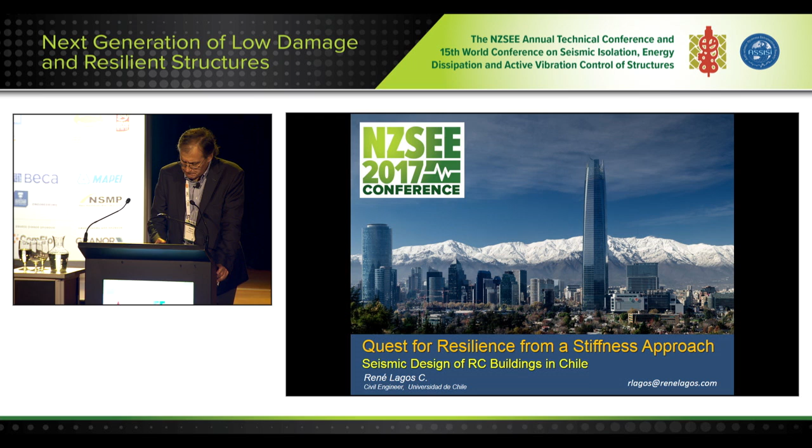So what questions will I address in my presentation? First of all, what is resilience? When do we set the performance standard in a project? What is damage? What is an acceptable level of damage for buildings? What are the possible strategies to achieve resilience? I'll speak about the Chilean practice and go to final remarks.

So what is resilience? Probably the simplest definition of resilience would be the ability to recover and return to normal functioning after adversity. So we're speaking about functionality, retaining and returning, or recovering, to functionality.

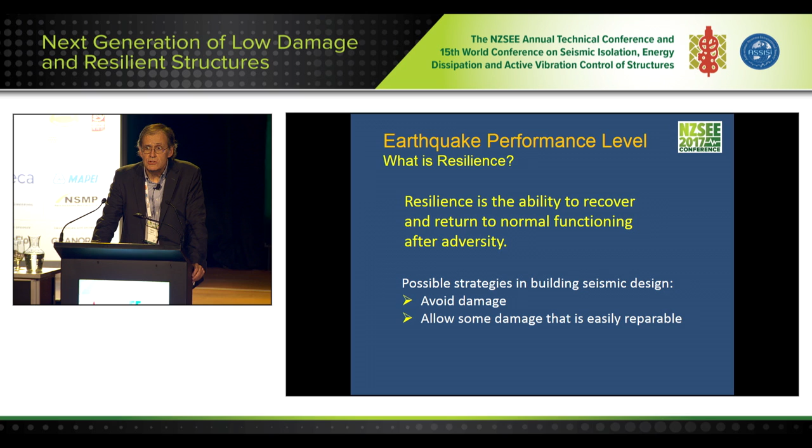Probably the opposite to functionality would be damage. So if we think of damage, the possible strategies in seismic building design would be, first of all, try to avoid damage. Sometimes that is too expensive and we cannot do that, so we have to move to allow some damage that is easily repairable. This is in the majority of the codes as a philosophy at the beginning of the seismic codes throughout any country in the world.

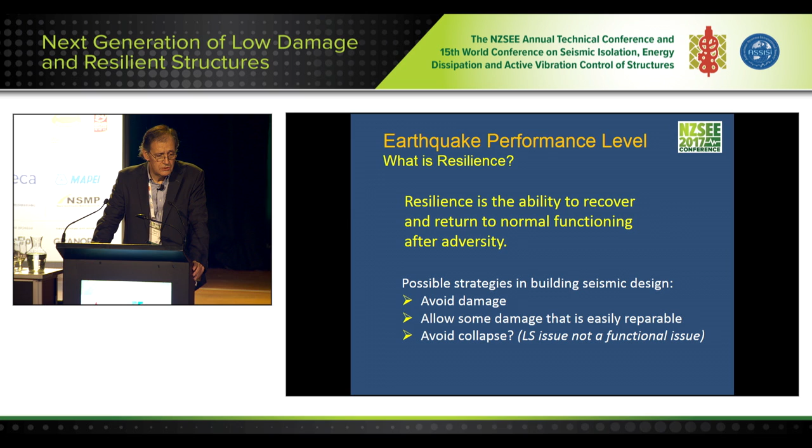Additionally, you will find there the words: avoid collapse. It is important to mention that if we are speaking about resilience, the avoidance of collapse, although it is a major issue and a very important one, is a life safety issue and not a functional issue. So we're going to focus on the two first in order to speak about resilience.

So the big question is, when do we set the performance standard in a building when we work on a project? When we start working on a project, we can distinguish usually two big phases. The first one is related to the conceptual phase, where based on concepts and strategy, the structural engineer simply makes the definition of the structural system he wants for this particular project.

Then comes a second one, the largest one, where you do all the analysis, design, and detailing of that structure, which is nothing else than the implementation of that strategy. The important thing one must be aware of is that in this first phase, the structural engineer is absolutely free to select whatever he thinks is best for the building, the best alternative of structure for the building.

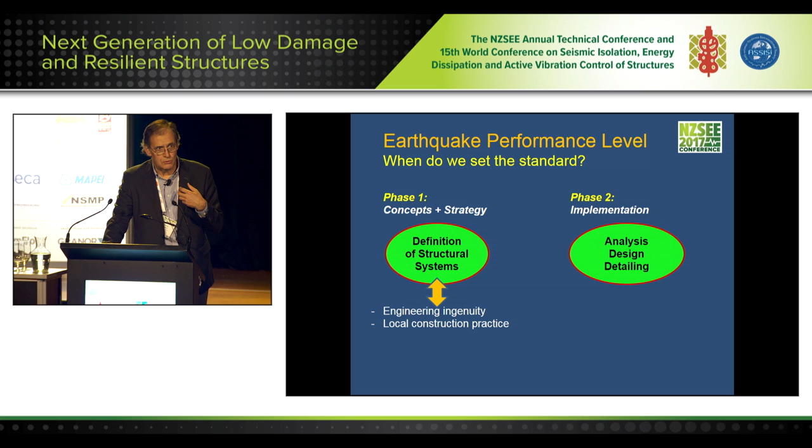This freedom and his choice is based generally in engineering ingenuity, and is limited usually by local construction practice, which is one of the biggest problems for the structural engineer to be really free to do whatever he thinks is best. On the second phase, there's no more freedom; the structural engineer is faced with following the code strictly. So the statement I want to make here is that good performance starts at phase one.

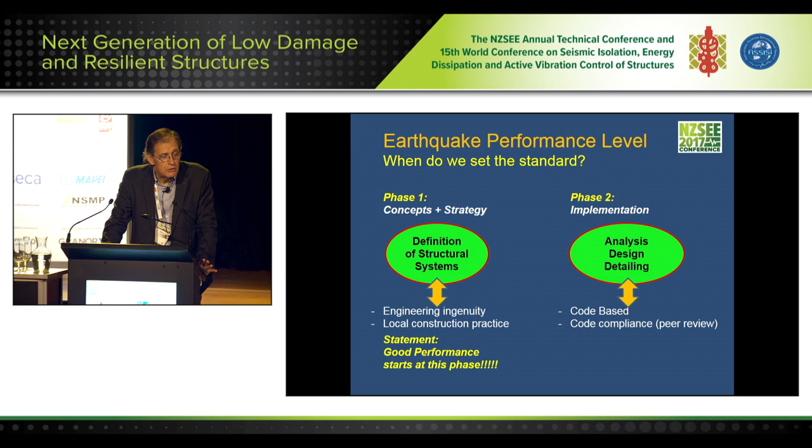Before you get into the code, you have to make the definition of the structural system for your building. So now let's move to what is damage.

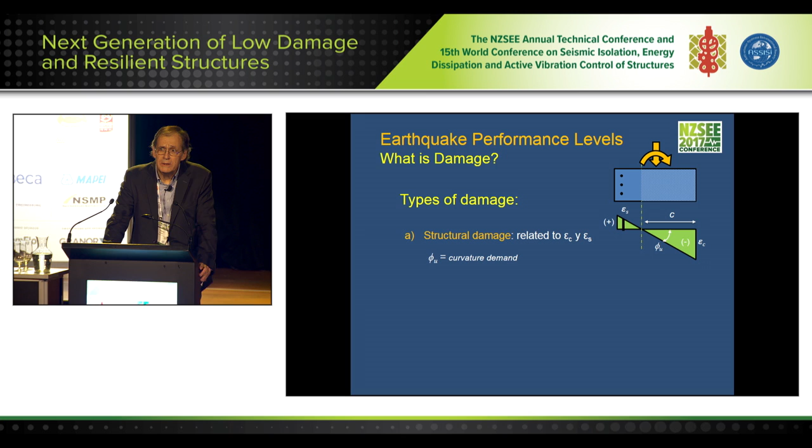There are different types of damage: structural damage, non-structural damage, and content damage. If we go through structural damage, we leave out shear failure type of damage because it's brittle and we don't want it in our buildings because it's dangerous.

So as long as we think of flexural damage, you can see in the image the strain diagram of what's in any section subject to flexure. Damage is related to strains. Every time the strains in our section go beyond certain values, like around 0.3% for concrete and 0.2% for steel, we start collecting damage.

So if we think of frame type structure, damage will be located on the plastic hinges wherever they are in the structure. Those plastic hinges appear depending on the roof displacement and the height of the building, which we will call roof drift.

If we think of wall type buildings, damage will be located at the critical section, usually at the base of those walls. You can also find a relation between the roof displacement and the strains in the concrete at the critical section. In the case of non-structural damage, non-structural elements usually are not continuous throughout the height of the building, but rather exist only between two consecutive floors.

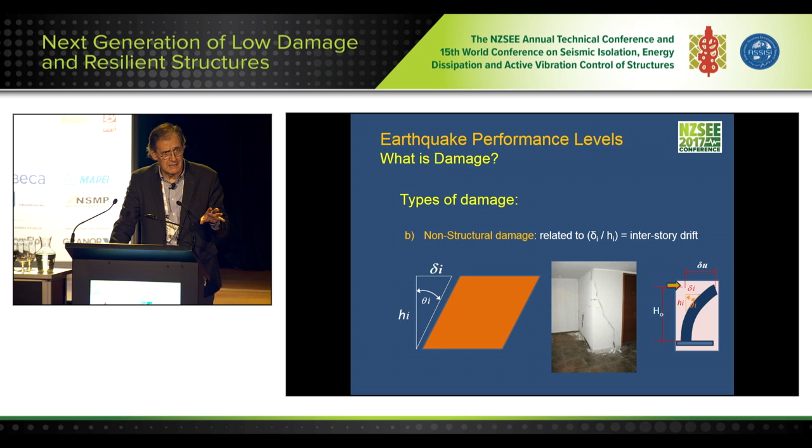So in this case, damage is related to interstory drift rather than roof drift. The important thing to note is that interstory drift is related somehow to roof drift, depending on the type of structural system that you use.

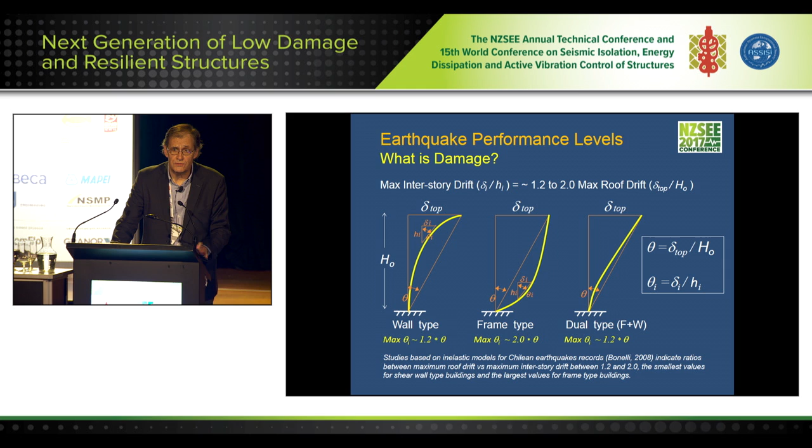If you use frames or wall type systems, here you see the shapes of the elastic deformation of those types of lateral systems. You will get much different interstory drift for the same roof drift. Actually, you get much higher interstory drift in frame buildings rather than shear wall buildings. This is important knowledge to have when you are thinking of the best alternative in the first phase of structuring your building.

You can see that when you want to reduce the roof drift, you have to move to very stiff structures. But if you select a stiff structure, you're going to get high acceleration. So if you reduce A and B, you increase C, and vice versa. So no, you cannot, with conventional structures, solve all three types of damage simultaneously. You would have to use some special seismic protection devices, in which case you can control all three, as we will see later.

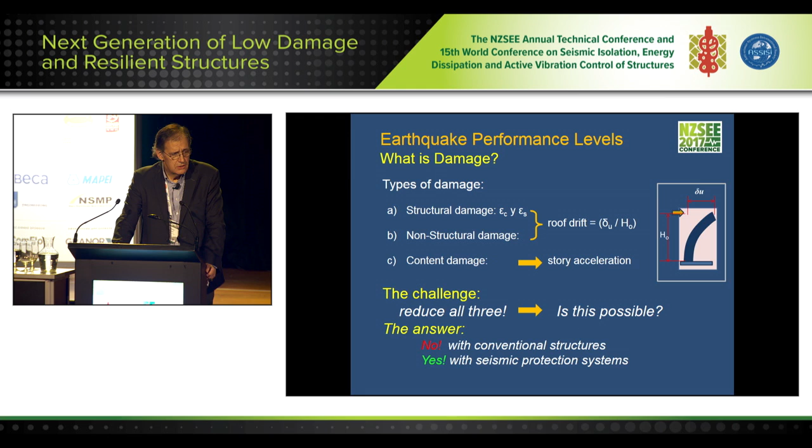So now, what is an acceptable level of damage? That is a big question. Historically, I'm sure you're all familiar with this matrix, which was proposed by SEAOC Vision 2000.

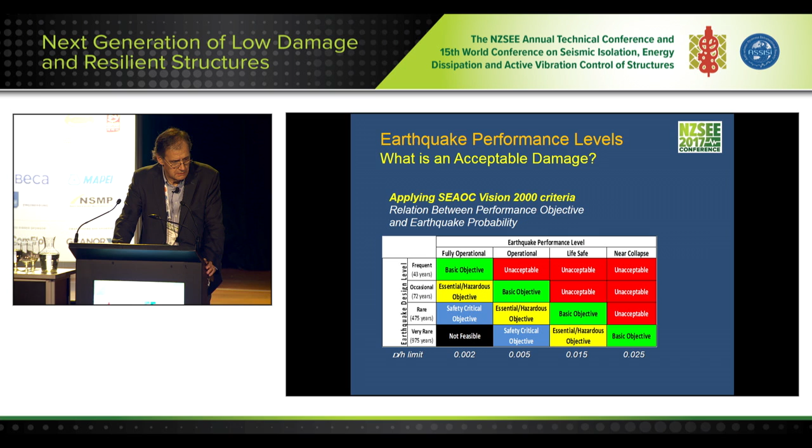This represents a relation between performance objective and earthquake probability of occurrence, where depending on the type of use for the building, you define a certain basic objective, which would be an acceptable level of damage. The important thing here is that the parameter used to quantify this is the drift, delta over H. But this is just one way to quantify the performance.

But should we do it from the perspective of the structure, or the people, or society? Why am I asking the question this way? Because it depends on who you are thinking of. The answer to this question might be different, as we are going to see in the next pictures.

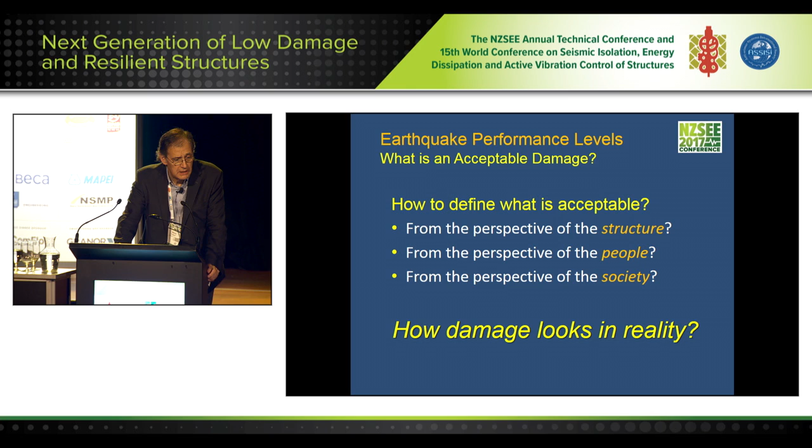If we look at that, those are major cracks affecting non-structural components. But what if behind those walls you have bathrooms or maybe a kitchen? Probably the owners of that apartment will not be able to go on living there. It will have to be evacuated.

Is that an acceptable level of damage? From the structural point of view, it is. From the point of view of the people living there, from the social perspective, absolutely not, because you might think what would happen if you have 100 buildings in that same condition.

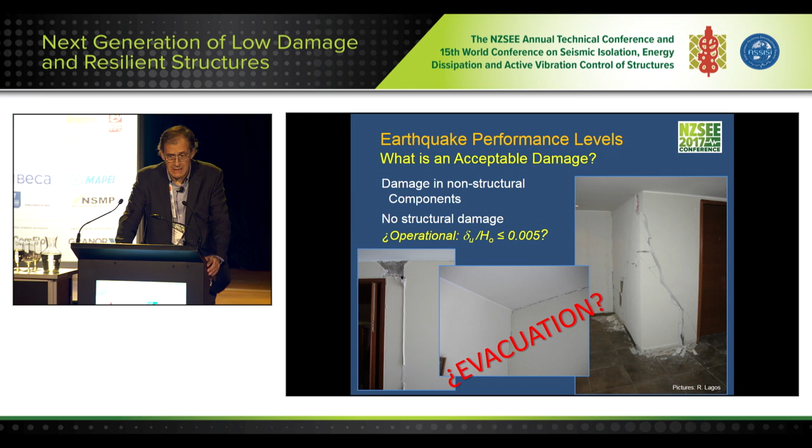Another example would be these cases of structural damage, pictures that came out of our last earthquake. Of course, in case of this structural damage, big buildings would have to be evacuated, and this is not acceptable from a resilience point of view.

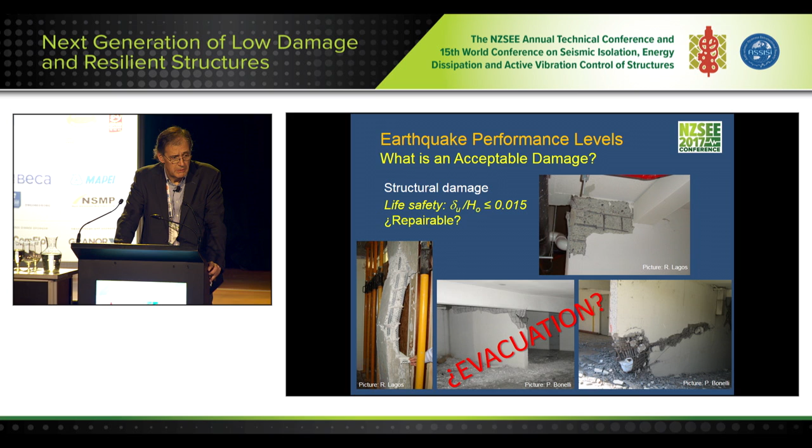More structural damage, very impressive, some of them. And of course, something that is totally unacceptable is collapse.

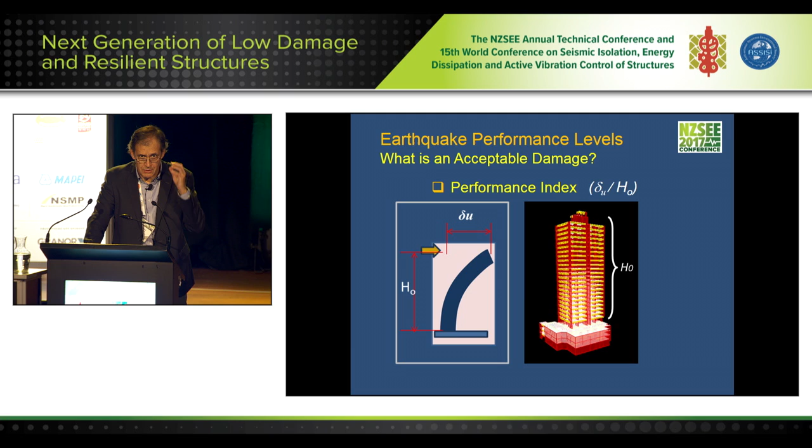So if we want to take a deeper look into performance, let's look at what the performance index, which is roof displacement divided by the height of the building, means. We can always run the numbers and see what's the performance index for one of our buildings, but the idea is to understand the variables involved behind this parameter in order to use that knowledge in the first stage, the conceptual stage, before you run any numbers.

So in order to do that, we can start with the roof displacement spectrum, which is on every code, every seismic country. The roof displacement spectrum usually has a bilinear form, like you can see in the picture. And if you divide that by h sub 0, you get the expression to the right.

And if you move the term in parentheses to the left, you get the bottom expression, which is very interesting because it has 3 terms. The first one is the performance index, which is what we are trying to understand.

The second one is a parameter which is h over t. H is the height of the building, t is the crack period of the first mode of the building. So those two, h over t, depend only on the structure.

And you can think of it as having units of velocity, how quickly the building reacts to the shaking on the base. And the quicker it reacts, it means the stiffer the structure actually is. So that's why we have called that parameter the stiffness index.

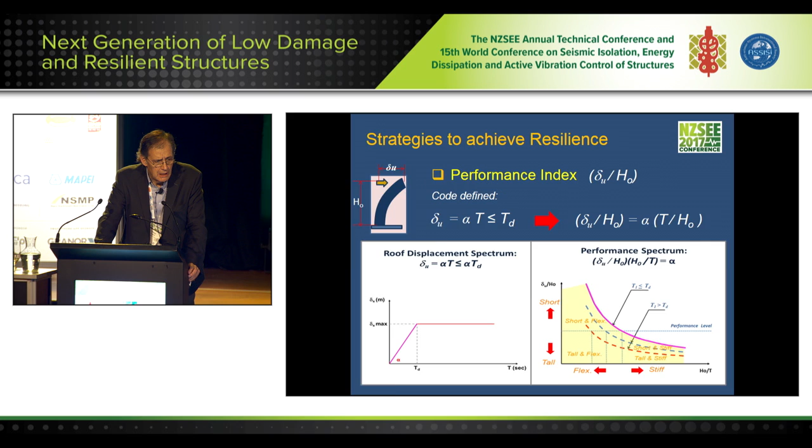So if we look at this image, we can realize, for instance, that a very efficient strategy in order to increase the performance index would be simply pushing your building to the right. By increasing the value H over T, that means by increasing the stiffness, you will get much better seismic performance. A horizontal line on this graphic would represent a performance level.

So far this graphic represents an approach starting from roof displacement or displacement demand.

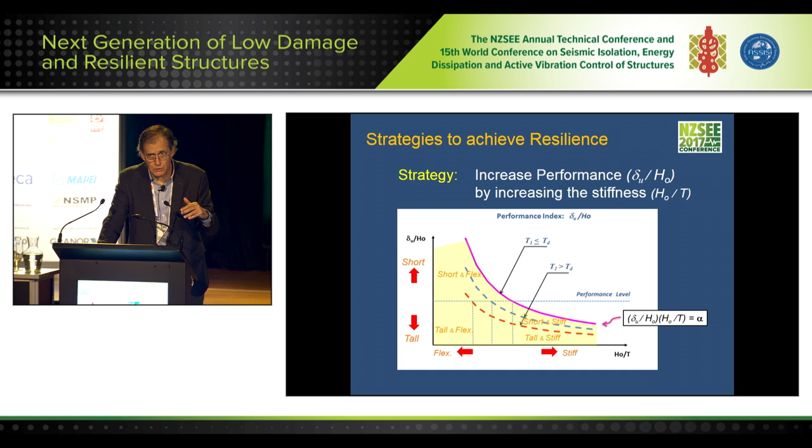We can think about performance from a different point of view, which would be from energy dissipation, something proposed by Dr. Mario Rodriguez with his damage index. What he did was simply relate the damage index to the hysteretic energy dissipated by an inelastic single degree of freedom model. He evaluated that for several earthquakes, several periods of structures, several types of lateral load systems, like frame buildings and shear wall buildings, which are represented by the H over T.

And this parameter with a value of 0 represents elastic behavior, and with a value larger than 1 represents the potential of collapse because you're getting damage.

Also, one of the variables considered is ductility, which you can think of as damping, in terms of how much inelastic behavior is acceptable within the building. So if you want elastic behavior, of course, you're going to get a much higher response of the building.

Okay, so here's another image of the same, evaluated for an earthquake in Chile.

Let's compare these two approaches. If you look at the one on top, performance and the damage index are pretty similar, with both indices on the vertical axis, and if you look at what H over T says on the horizontal axis, they're almost identical. The interesting thing about these graphics is that you identify 3 of the most important variables related to performance, damage, or resilience: the value H over T, the natural period of the structure, and ductility and damping.

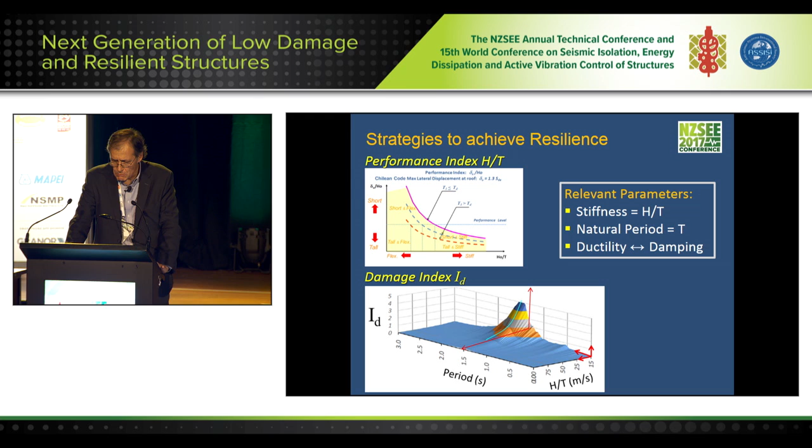So you can see that depending on the type of strategy you're going to use, these are always the 3 most important or most relevant variables associated.

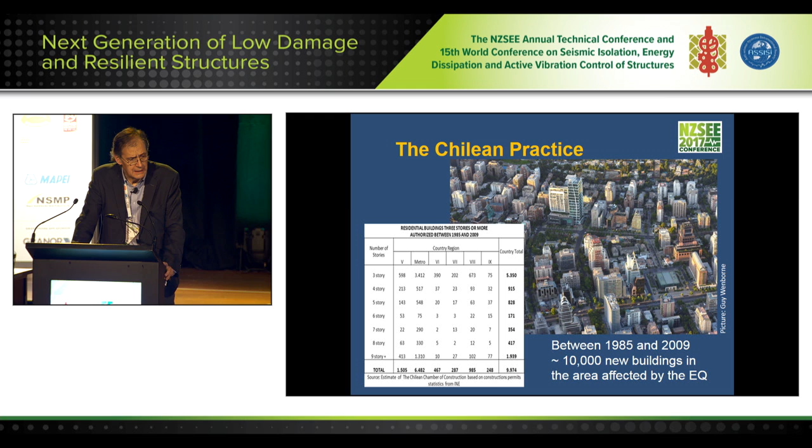Now let's take a look at the Chilean practice. Within 1985 and 2010, which is 25 years between the 2 largest earthquakes we've had in the central zone of the country, some 10,000 buildings were built according to that statistic, ranging between 3 and 55 stories high. Of those buildings, 20% had 9 stories or more.

Statistics say that the buildings that collapsed were 5 in 2010, and the buildings that had to be demolished due to damage were approximately 40. So the statistics say that between 0.5 and 2% of those buildings were failure cases. The rest suffered non-structural damage, and in some cases minor repairable structural damage, which in a way you can say was a very successful performance.

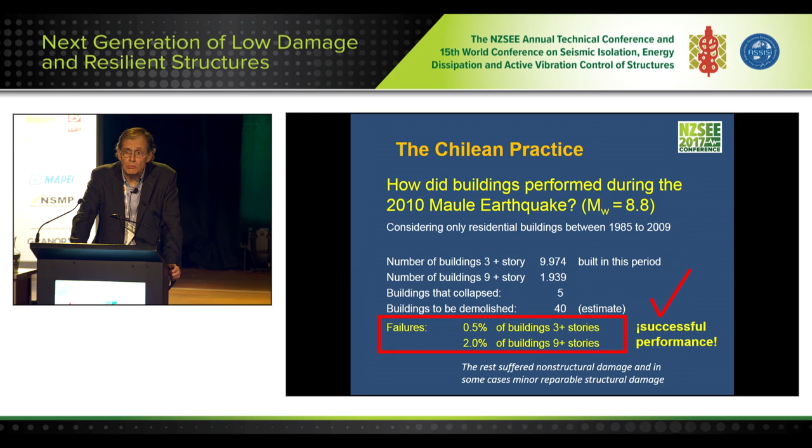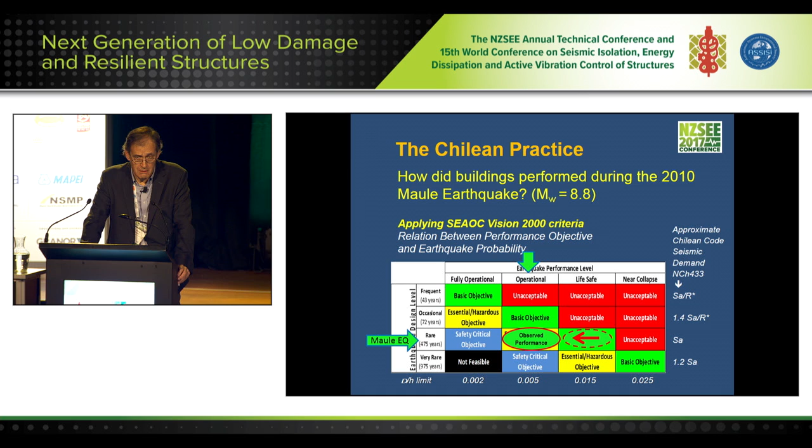Let's take a quick look at the local practice regarding buildings. We can see here we have flat slabs. We don't usually have beams inside the plants. Usually we have a lot of shear walls.

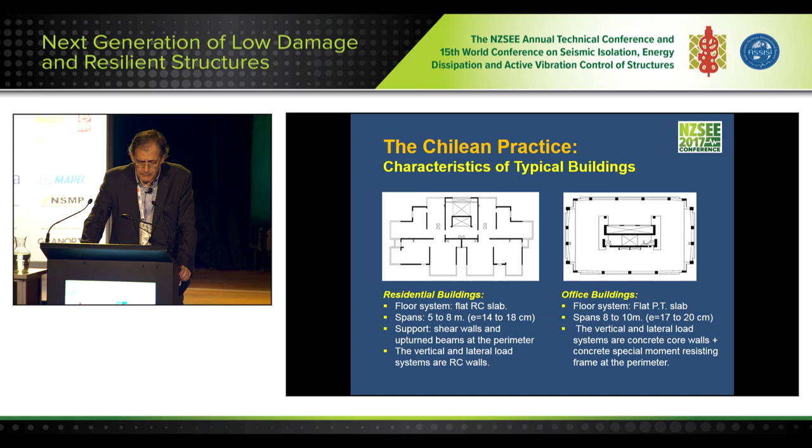Let's go and see some images, I'll go quickly through this. You can see many shear walls, frames at the perimeter, not too many frames. Shear walls are coupled, forming shapes - L shapes, C shapes, and then T shapes. In the case of office buildings, we concentrate those walls in the core.

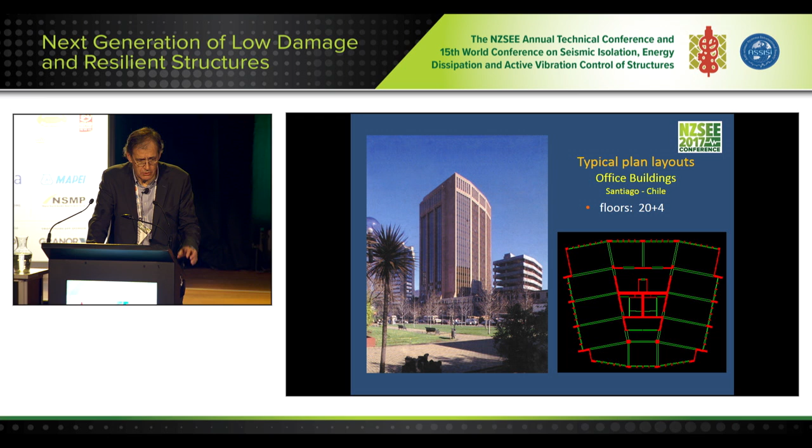So, thinking of phase one, how do we structure our buildings? Generally, like we were saying, we use concepts and strategies. The strategy is usually to make extensive use of shear walls in each of the principal directions. Those buildings you just saw had redundancy, had an important wall density, and had walls shaped L, T, and C.

If we think about the positive and negative sides of this alternative, redundancy means safety. It gives you additional lines of protection. When one fails, you have a second and a third, and maybe a fourth, and that prevented our buildings from falling when we had problems. It has no negative side.

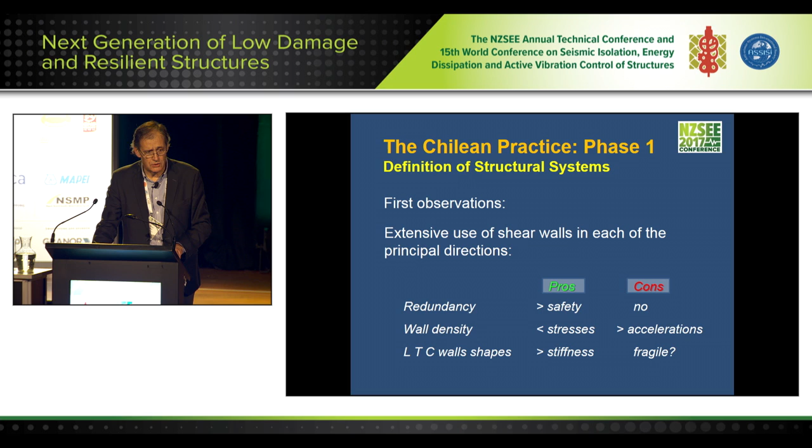Wall density helps reduce stresses, compression and shear forces in the building. The negative side is you get stiffer buildings that might give larger acceleration, even though in general, in our buildings, acceleration hasn't really been an issue. Wall shapes of L, T, and C form also increase stiffness, but the problem is it's sometimes difficult to design for ductility at the borders of those walls.

Trying to understand the characteristics of this building, historically we have used certain indices that allow us to quantify these types. One very simple index is the wall density index, which is somehow the wall area in each principal direction divided by the weight of the building above that floor.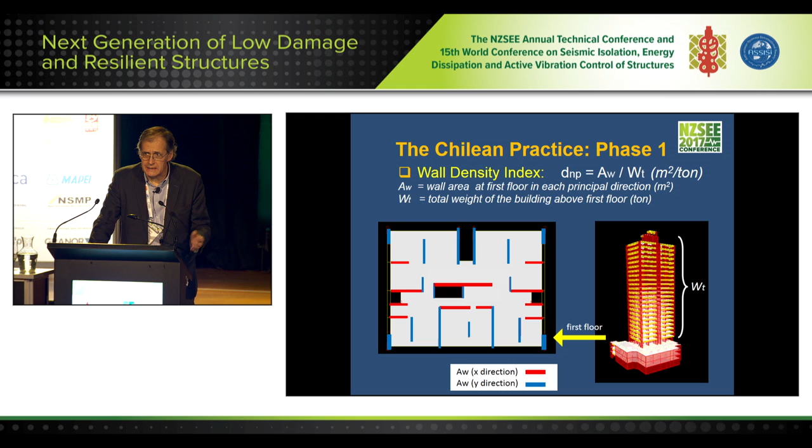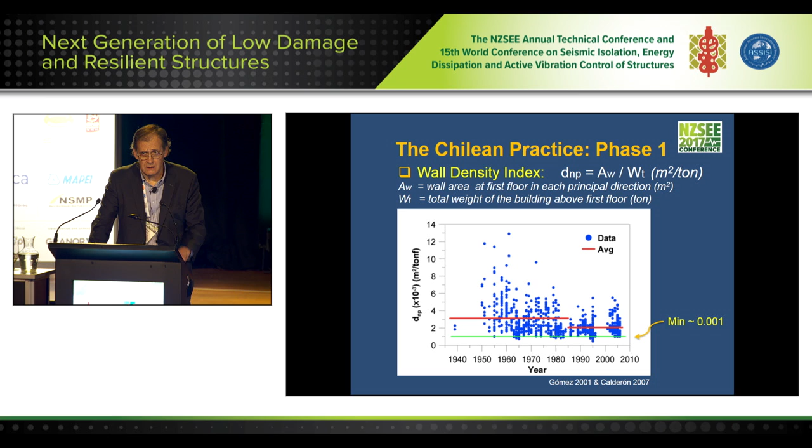This is the graphic of historical values. You can see there's a decrease in the average value, but the important comment is not the average value, but rather the minimum. There's always a minimum we never go beyond, which is 0.1%, because it has been experienced by us that that number gives good protection against drift and gives us very stiff buildings.

Now if we think of the inverse of the wall density, it has units of square meters divided by tons. The inverse of that is related to the average of compression forces on those walls, and also related to shear forces acting on them. So we can draw a lot of information out of this kind of index.

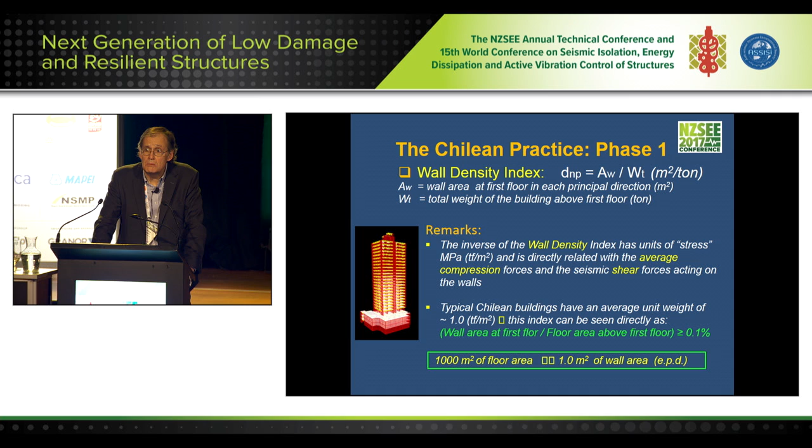If we want to think of it in a simpler way, usually buildings have a unit weight per floor area of 1 ton per square meter. If we replace that value in the formula, the wall index is simply a relation between areas, between wall area in the first floor to floor area above that floor. So a simple rule of thumb we usually use to structure a building is to provide 1 square meter of wall area for every 1,000 square meters of floor area above that.

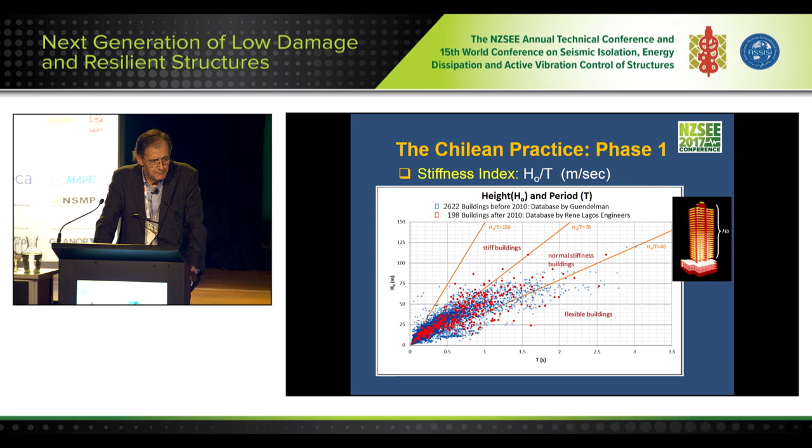Now if we think of the stiffness index, it's the parameter we call H/T. This is a graphic of buildings designed and built before and after the earthquake. For us, normal stiffness is H/T higher than 40, and flexible buildings, usually frame buildings, would be below 40. A very stiff building would be 70 and above. So that is the type of walls and structures that give us the level of performance we observe on this graphic.

But the big question many times asked of us when we tell these stories to people from different countries is how much money you spend doing this type of structure. So I want to show you a comparison of the concrete ratio index and the steel ratio index. The concrete ratio index is how many cubic meters of structural concrete we use per usable square meter of area. We can also call this the equivalent slab thickness, since it has units of length.

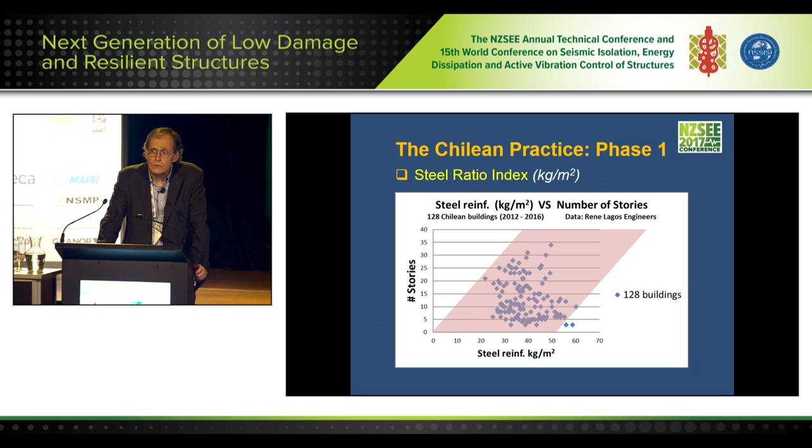If you think of a steel ratio index, that's how many kilograms of steel per square meter. Again, if we go to a 20 to 25 story building, you get 35 to 40 kilograms of steel per square meter of usable area, which is also very reasonable.

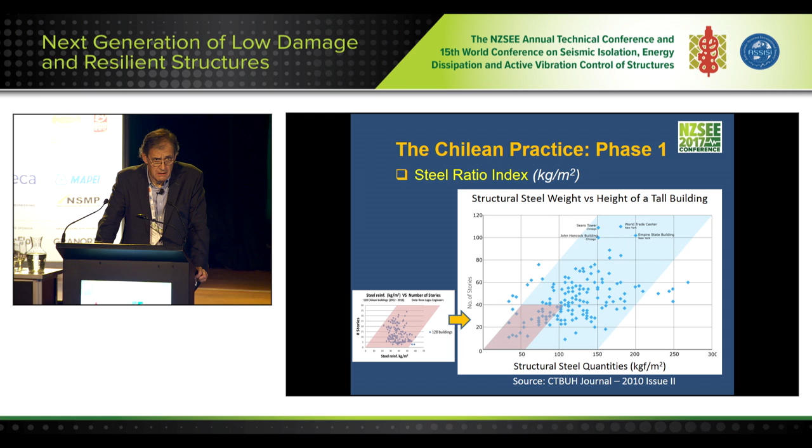I've chosen to compare it with this graphic that I took from the Council on Tall Buildings Journal, published some years ago, even though it was meant for steel buildings. But you can see if we place the numbers I just showed you with Chilean practice, they fit right in the lower left, which means it's a very efficient way of spending money on structure.

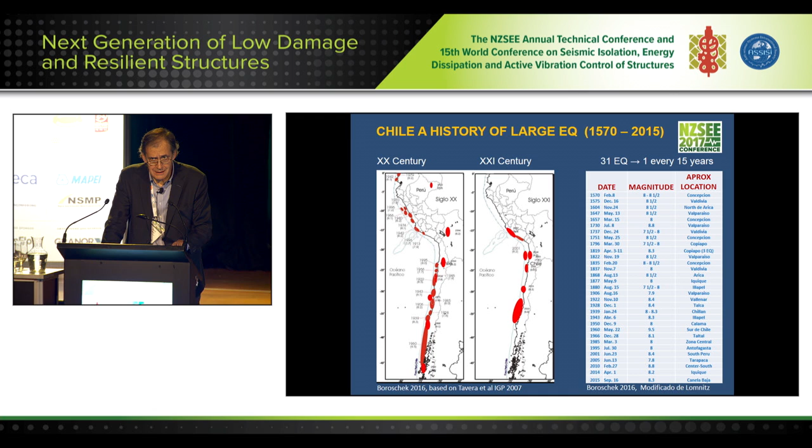In order to understand the philosophy behind this, it's important to know that Chile is one of the most seismic countries in the world. We have in our history more than 30 events of magnitude 8 or higher. We have an average of one every 15 years, but in just the past 10 years we've had 3 of those events. So we think of big earthquakes as something natural, not just a probability.

One problem you're already aware of is that when you have those big subduction earthquakes, they have a very long rupture length, meaning they affect several cities simultaneously.

For example, in 1960 the 9.5 magnitude Valdivia earthquake had approximately 1,000 kilometers length of rupture. In 1985, the Valparaiso earthquake, magnitude 8.0, had 220 kilometers of rupture length. The 2010 Maule earthquake, magnitude 8.8, had 500 kilometers. So again, many big cities in our country were affected simultaneously.

So in reality, we've assumed that for any given building we design, the design earthquake will take place at least once in the lifespan of the building. It's not a matter of probability, it is a certainty.

Of the more than 1,000 buildings I've been responsible for the structural design of in my engineering practice, I can tell you that probably close to 1,000 have been subjected at least once, and many twice, to some of these magnitude 8 or higher earthquakes. So one has to be very careful, because society will make you accountable for the things you have done.

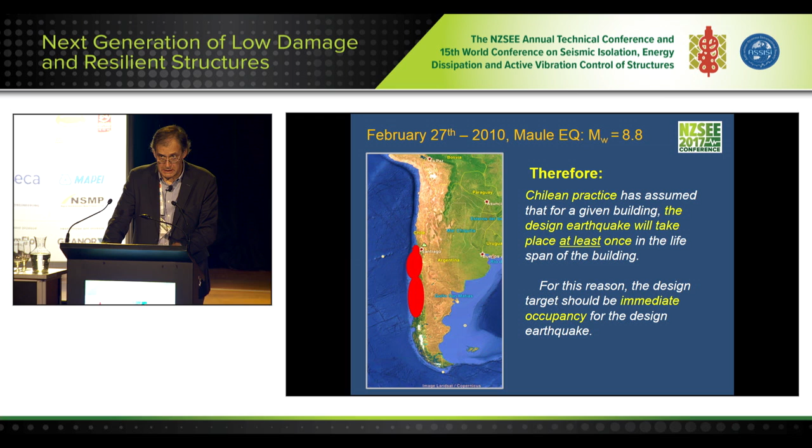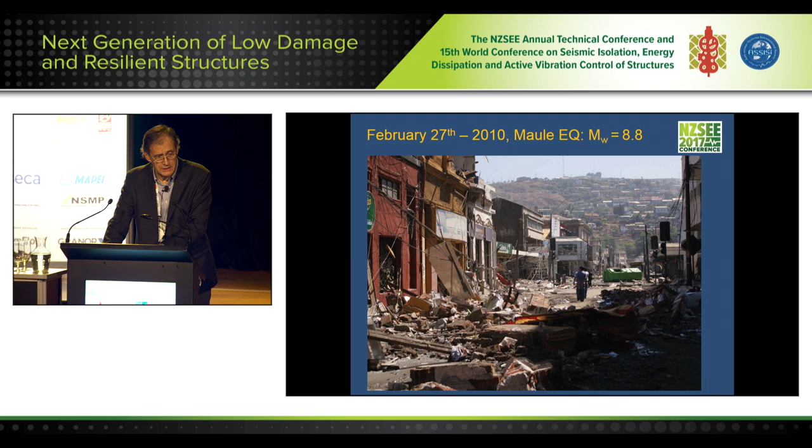So this is how many of our cities, especially around the coast, look after an earthquake. You can see there's a lot of damage, but most of that damage is related to very old houses, adobe houses, unreinforced masonry houses, types of construction not done by structural engineers. Nevertheless, if we think of new construction, we did have many problems, as we can see here.

I want to quickly share what lessons these buildings taught us after the earthquake. The first thing is that of the severely damaged buildings, half had failures attributable to misclassification of foundation soils, resulting in larger displacement demand than could have been anticipated using the code. So we had to fix our code after the earthquake.

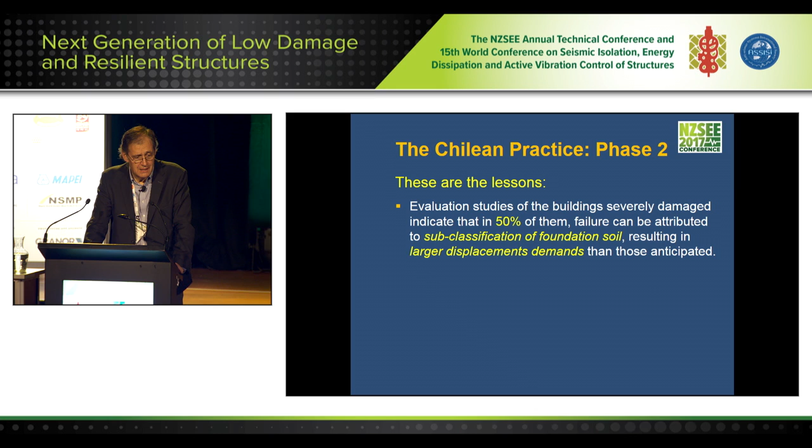The other half of the buildings had failures attributable to structural reasons that could have been avoided. This is important - one was poor structural detailing, so we had to improve the way we detail. The use of boundary elements wasn't enforced in our code until now; we changed that. Also, there were construction mistakes.

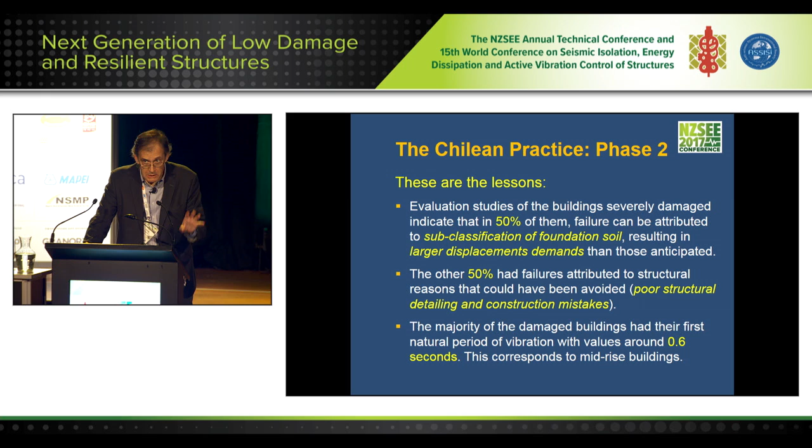Another important issue is that the majority of damaged buildings had their first natural period of vibration around 0.6 seconds, meaning buildings of mid-height. We'll see later why this is a problem.

Our codes do not have explicit prohibition against using irregularities. So one thing you could easily notice looking at our structures is that we use them, unfortunately, very frequently. Much of the observed damage occurred around the concentration of stresses in those areas.

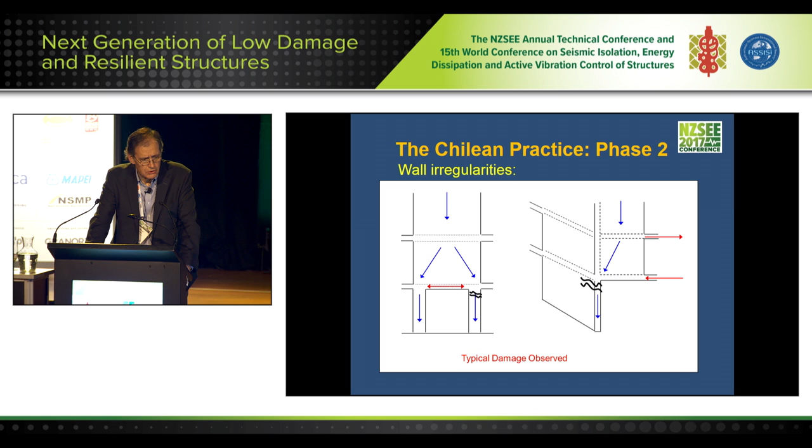One typical thing we have to use, because of structural and owner's requirements, is what we call flag walls - the reduction in length of walls in the lower floors, usually underground, because of parking requirements. The client says no parking, no building, so you better come up with an intelligent solution.

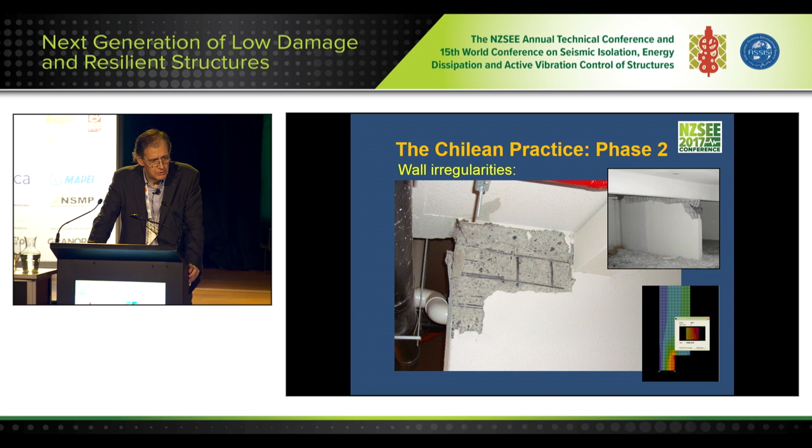And these are the kinds of problems we've encountered in those reductions, where we get a concentration of stresses that produces crushing of the concrete. So what are the changes we made to our code?

In the loading code, we address soil issues: we have to change classification, we increase the spectrum for soft soil, we include amplification effects.

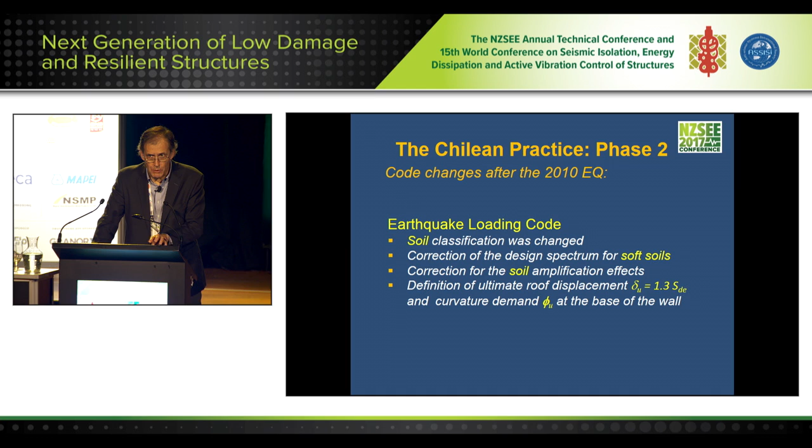One of the important things we decided in order to control damage: we define a roof displacement, an ultimate roof displacement, which we call delta U, representing the observed roof displacement in the 2010 earthquake. We're going to use that roof displacement to control damage, as we will see in the next slide.

In the concrete design code, we made changes. We limited the slenderness of the shear walls. We limited the maximum compression on walls. We limited the maximum concrete strain to 0.8%, and this has to be achieved when we displace the roof to delta U. We require a minimum thickness of 30 centimeters for boundary elements and so on.

So our code is no different than most codes in the world, in that we have to do modal spectrum linear elastic analysis. The design loads are the elastic response loads divided by the R factor. Then we have to comply with the minimum base shear, and we have a very strict drift control at the center of mass and the perimeter. These two last requirements, the base shear and the drift control, are actually responsible for the stiff buildings that we have.

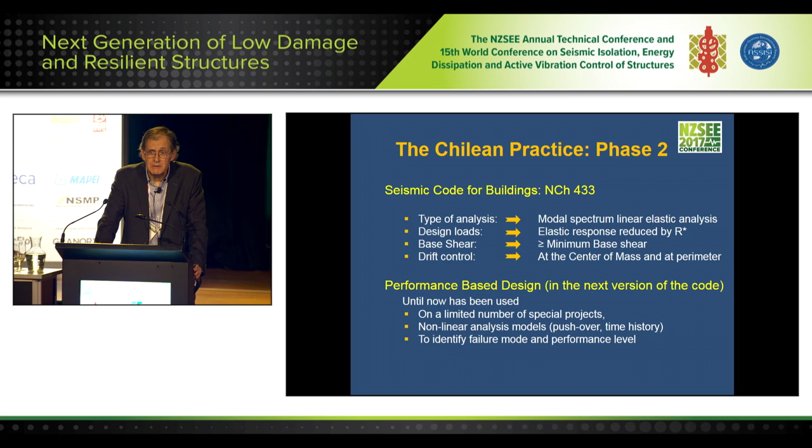Performance-based design hasn't been in our code so far, even though it's going to be in the next version, because we already have a draft finished for discussion. It's only been used historically on a limited number of projects for certain special cases.

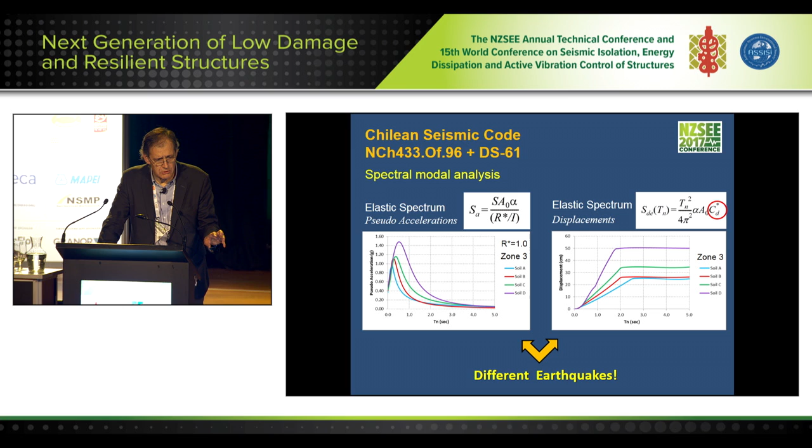I'll go quickly through what is the acceleration spectrum and displacement spectrum. They have the typical shape you can find in any code. The important thing I was mentioning is that these two spectra correspond to different earthquakes. The one on the left is what we use for strength design - that's what historically we have done.

The one on the right was fixed and upgraded to the displacement that we observed during the 2010 earthquake, and that's what we use for damage control.

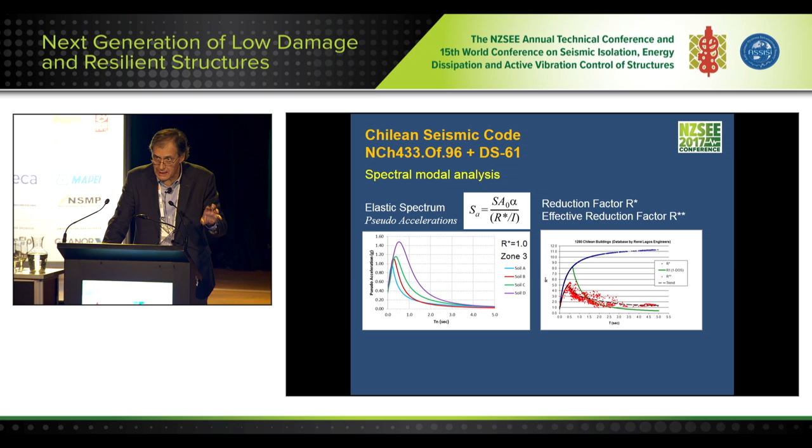We have to check that our walls go no beyond, the strain does not go beyond 0.8%, like I mentioned. The effective R factor is somewhere between 1 and 5, up to 5 being the largest, around 0.5 seconds, which is the area of major damage observed.

The minimum base shear limitations, depending on the seismic zone: zone 3, which is the highest, is 6.7% of the weight of the building, and in zone 2, which is Santiago, it's 5% of the weight of the building.

And the inter-story drift, which has to be verified for reduced forces by R, we cannot go any further than 0.2% at the center of mass, and an additional 0.1% at the perimeter, considering plan rotation.

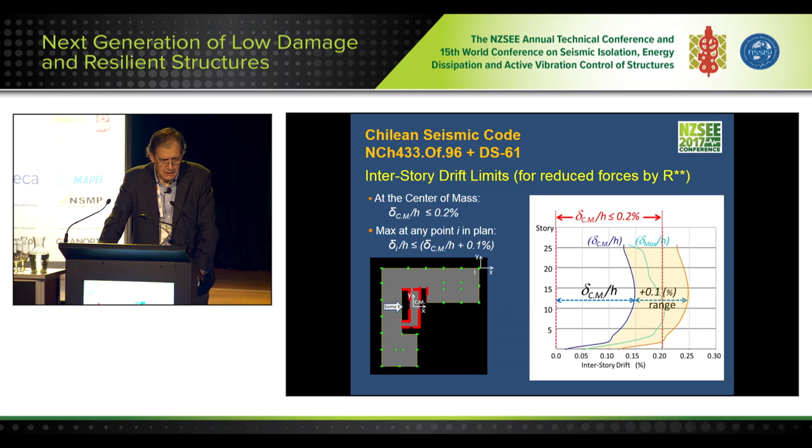Here to the right is a typical graphic that we do to check compliance with this requirement. I don't want to take more time on this.

How it works for us with the code: simply, you can see the blue curve there is the code elastic spectrum for accelerations - that's for a single degree of freedom. The elastic response of a real building would be the purple dots there, because they are multi-degree of freedom. Then we divide those values by R, and we have to check that we cannot go below the minimum base shear, which is the green line there. And there we get the red dots, which represent the accelerations for a design.

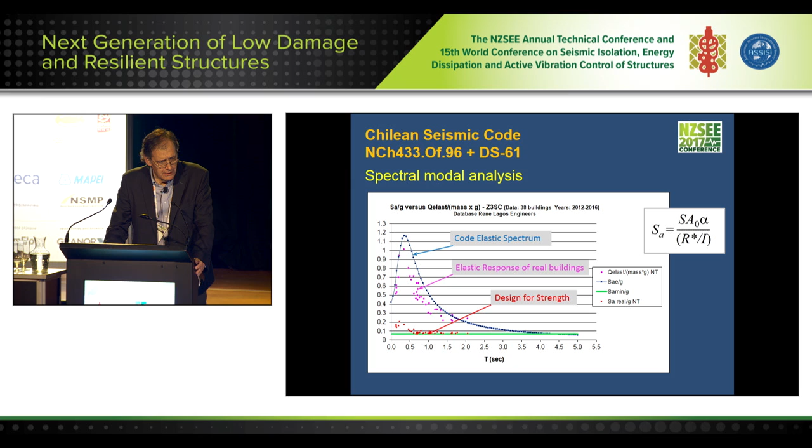So one of the things we have done: in this graphic, we know what delta U is because it's defined by the code. We know what delta D is because that's the design displacement. We don't know what delta Y is, because we seldom know it.

We would have to do a pushover analysis or something like that. But we can assume values between 2 and 3 that have been historically reported. If we take conservatively a value of 2, we can do a reasonable estimate of what the required displacement ductility is to go from design to delta U displacement.

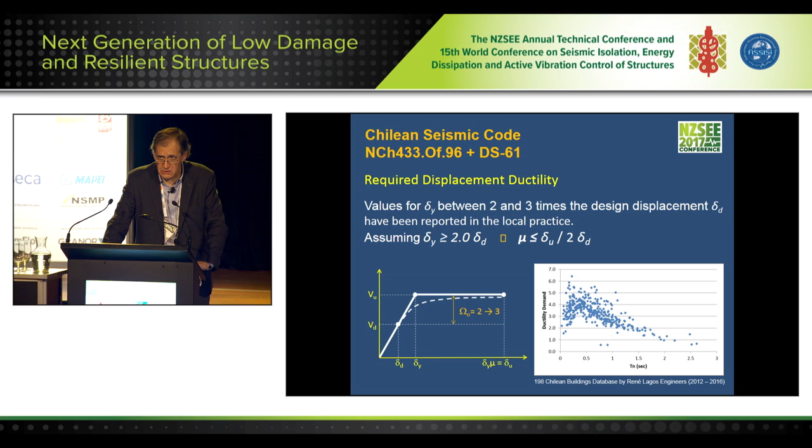We can see on this graphic to the right that values between 1 and up to 6 being the large, in general they are no larger than 4, but around 0.5 seconds you get higher than 4. That identifies the area that has to be studied and maybe updated in future versions of the code.

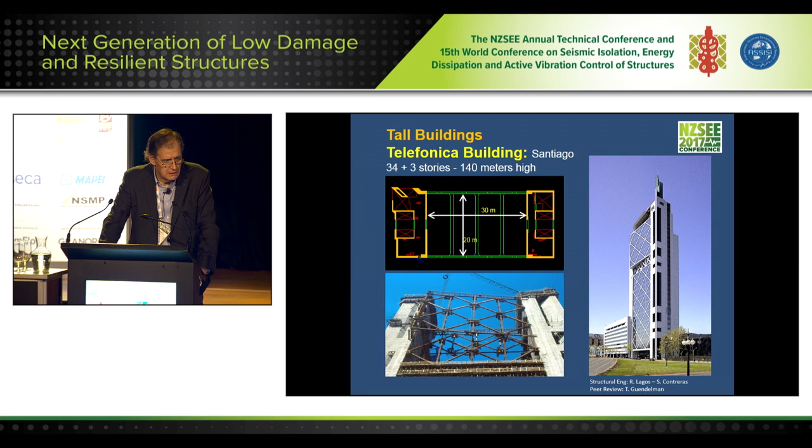Just a few examples of high-rise buildings that have been produced using all of this philosophy, local code. This used to be the tallest building, a very complex building in Santiago, the Telefónica building.

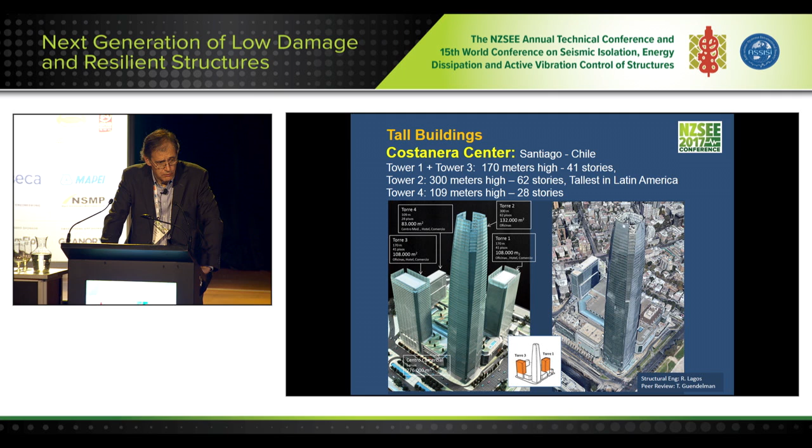This is the Costanera Center project that David just mentioned at the beginning. It comprises 4 buildings, out of which the tallest one and the smallest one are built. The others are built up to the 10th floor for the moment. It is a very iconic building. Probably if you go to the internet and ask for Santiago, the first thing that will come up is some of the pictures you are seeing here.

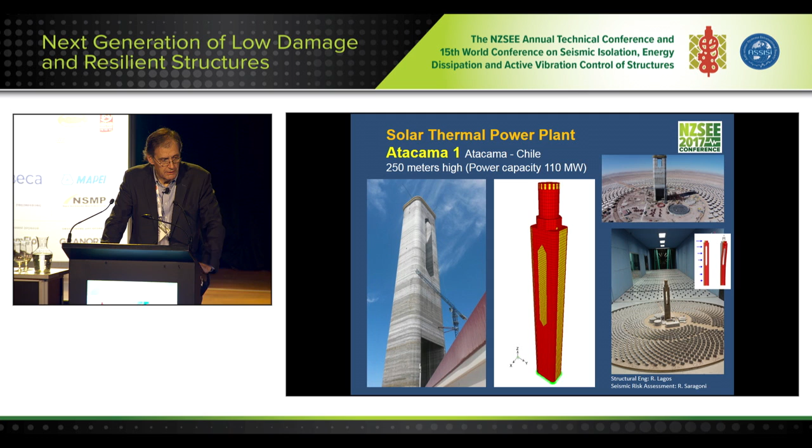Some very iconic buildings and very irregular buildings, like I was telling you, and many conventional structures like the one you see here. This is another example, not really a building for residential or office use. It is an industrial facility, a solar thermal tower plant, with a central building 250 meters high to collect all the reflected sun from the mirrors.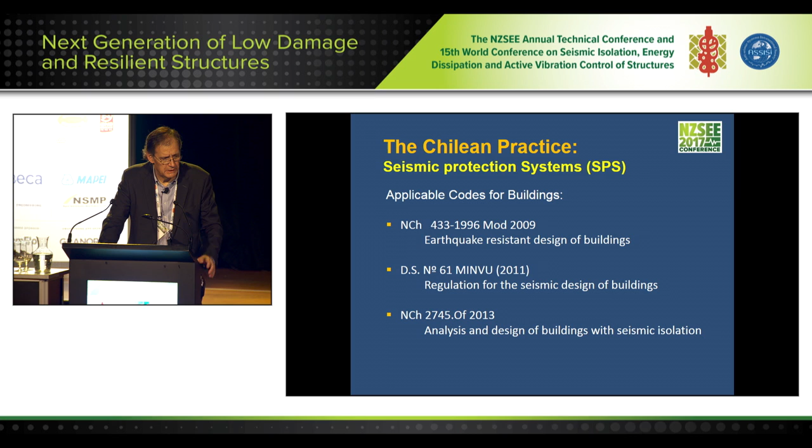That is finished as a structure, but the project is still under construction. Now, moving into protection systems, in Chile we have a special code for designing buildings with seismic isolation. We are almost done with a seismic code for energy dissipation devices, already written and under final discussion. But in any case, you still have to comply with the 2 codes that apply to general buildings, which are NCh433 and D.S. 61.

The first base isolation system built in Chile was in 1992. It was a 3-story building of confined masonry. They built 2 identical buildings, one with base isolation and one without. Both were instrumented to record and compare their behavior during a strong earthquake. All of these results have been published by University of Chile, which was behind this idea.

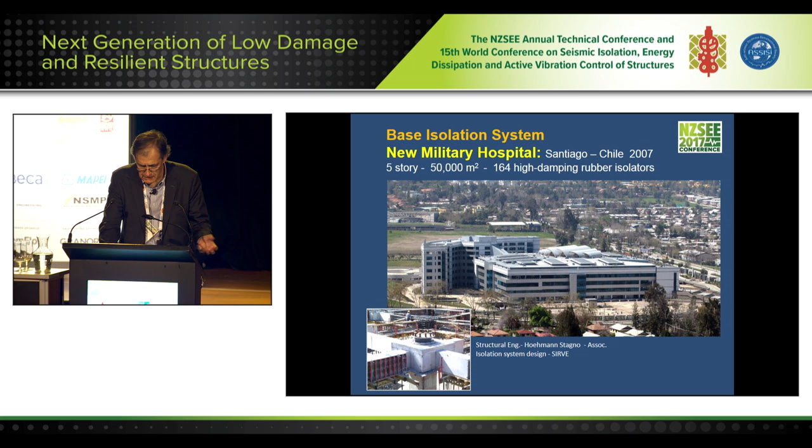After that year, base isolation started to be used mainly in private hospitals, and nowadays it's a standard requirement in any public hospital and in private ones as well. In 2010, when the big earthquake hit the affected area, 15 structures had seismic protection systems, 14 of which were buildings and 1 was a bridge. The important thing is that all of these structures performed extremely well, which is well recognized by people.

Developers saw this as a marketing opportunity by incorporating this technology into their newer buildings. It's important to know that the majority of the technologies used in seismic protection up to this year were locally developed as a result of research at the 2 principal universities, University of Chile and Catholic University.

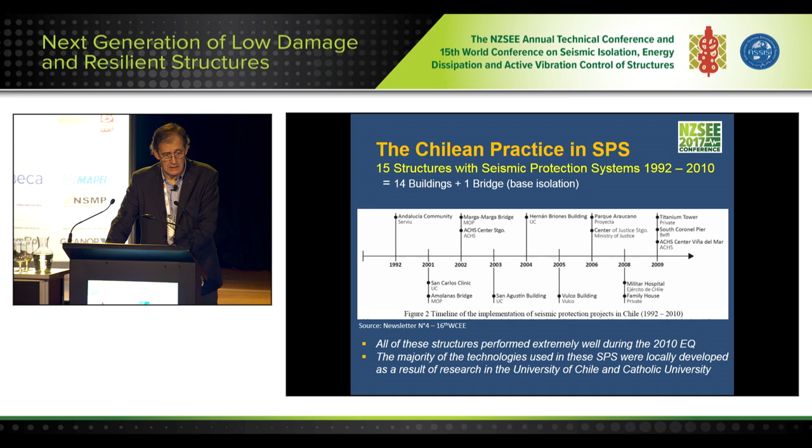Nowadays we have already designed and built a little over 100 buildings with seismic protection systems. Here's a graphic showing the number of stories from 1 up to 52 on the horizontal line, and the number of buildings on the vertical line, with colors showing the different types of systems used.

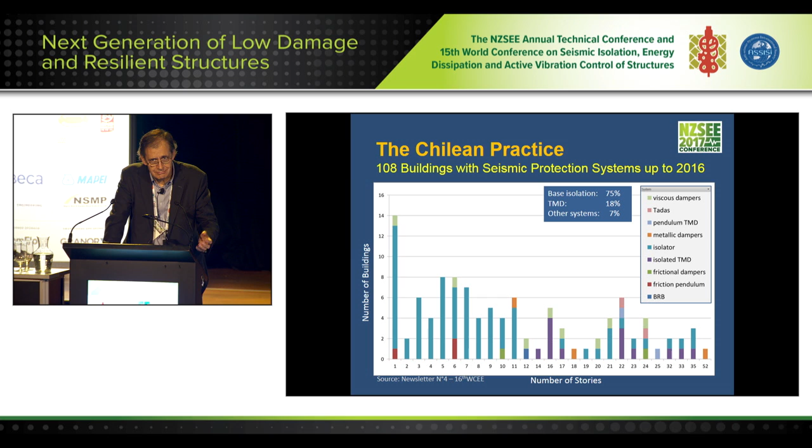75% of those buildings, a little over 80 buildings, use base isolation. 18% use tuned mass dampers. Tuned mass damper is something we do, but we don't like to do it, it's much closer to doing nothing, but it's the cheapest solution, and developers usually require it for marketing reasons. So we have to do it. Other systems make up only 7%.

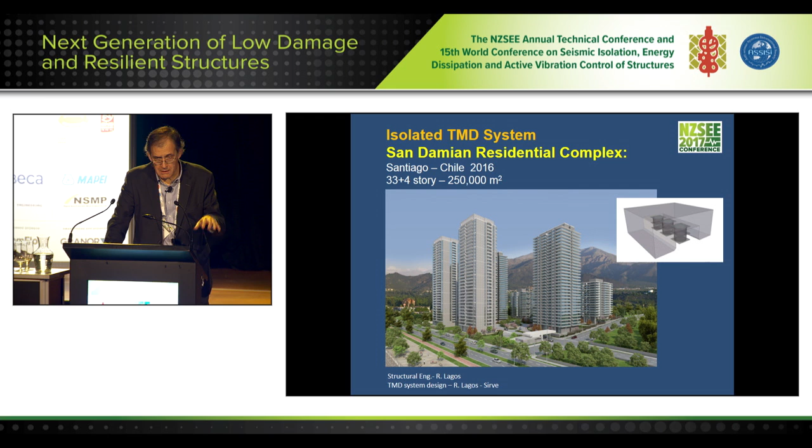An example of buildings that use TMDs. Usually TMDs are large masses placed on top of buildings, between 1% and 2% of the total building weight, sitting on isolators, lead rubber bearings or rubber bearings. Here's a pendulum TMD system with energy dissipation devices, which was finished last year.

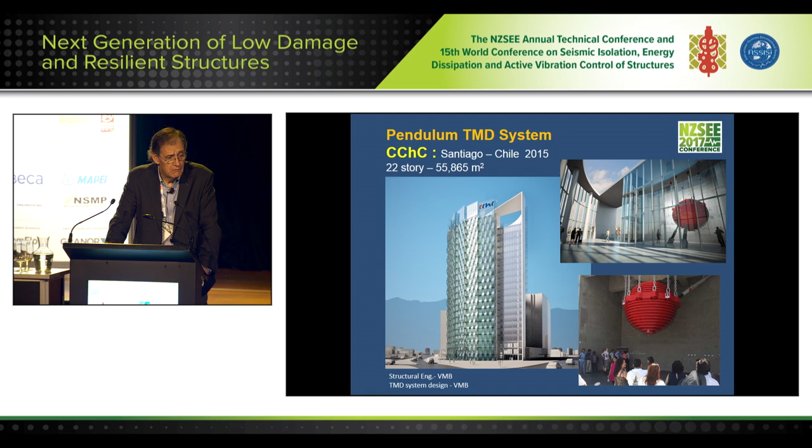Energy dissipation systems like viscous dampers in office buildings have been used many times. This is the tallest building with some kind of energy dissipation system, a titanium tower, a 52-story tower. This one experienced the 2010 earthquake with absolutely no damage. These are the metallic dampers used on that project, and the blue lines on the plan represent the places where these braces are located.

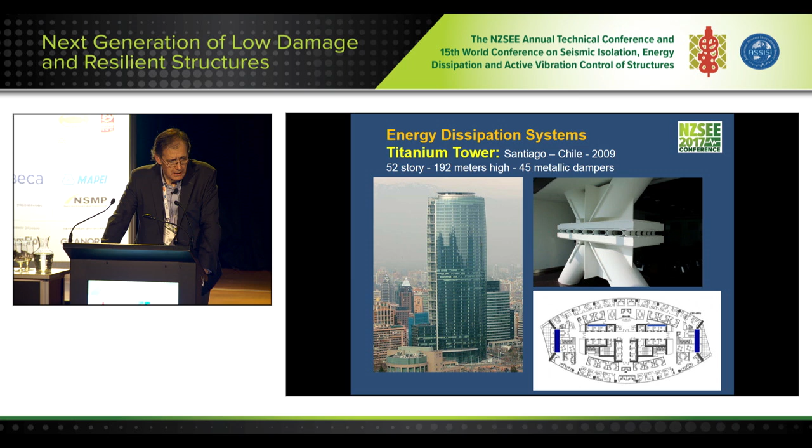It has to do with 8 reinforced concrete buildings that were designed in the 70s without any special seismic detailing, so the owners wanted to improve stiffness, strength, and hopefully add some energy dissipation capacity. After trying different alternatives, the building would have to be retrofitted while still being used by people living and working there. So the use of BRBs proved to be very efficient, and that's what's being implemented at this moment.

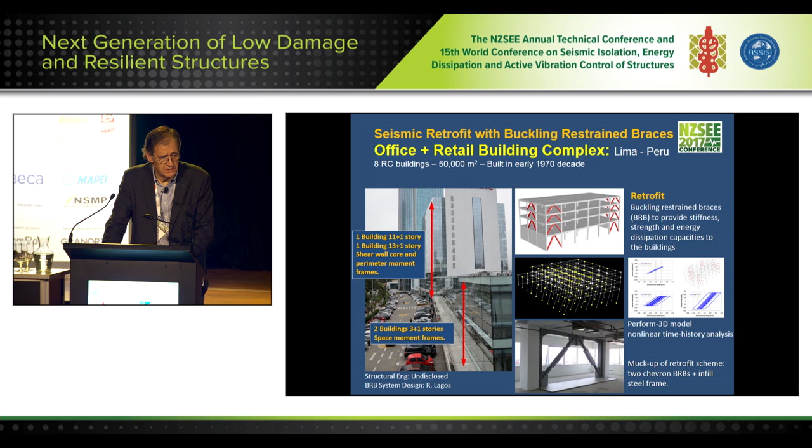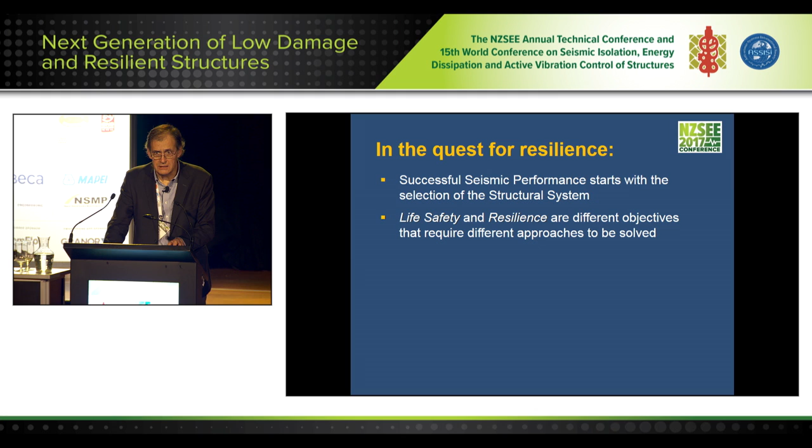Let's summarize what I have presented. In the quest for resilience, successful seismic performance starts with the selection of the structural system - this is a major point. Life safety and resilience are different objectives that require different approaches to be solved. Historically, structural engineers have thought that by designing for life safety, they have automatically solved the resilience problem, and now they're realizing this is not true. Life safety in conventional structures has to do with ductility, and resilience, as we've shown, has to do with stiffness - which are different things.

In conventional buildings, the adoption of a stiff lateral load system, which represents values of H/T, is an effective strategy to control damage and increase resilience. Seismic protection systems provide proven and cost-effective solutions to reduce damage and increase resilience. It is my thinking that today we have available the knowledge and the technology to provide society with safe and resilient structures. It's just a matter of what we have to do in order to start using them and assure that to everyone. The successful performance of Chilean buildings in the 2010 earthquake is a consequence of these last two strategies.

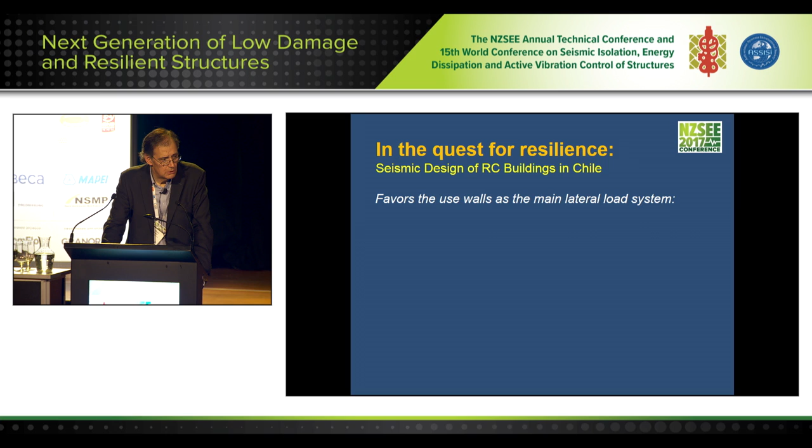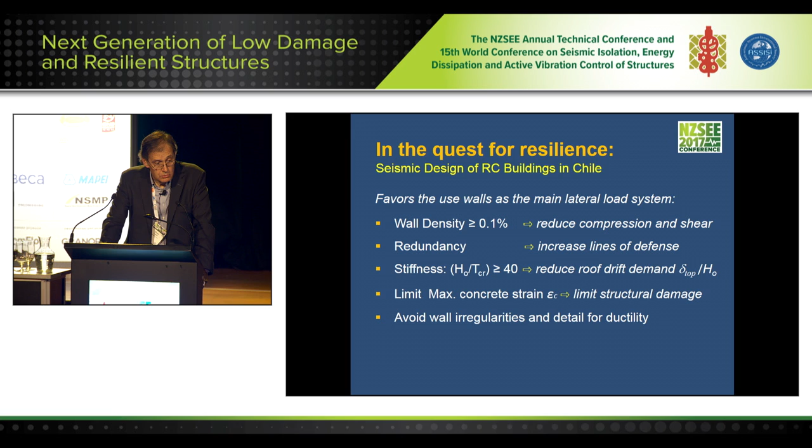Now, some final comments regarding Chilean practice. Chilean practice favors the use of walls as the main lateral load system, with wall densities above 0.1%, which helps reduce compression and shear on those walls. We use a lot of redundancy, as I mentioned, which increases the lines of defense. We use high stiffness values of H over T larger than 40 usually, which reduces roof drift demand. We limit the maximum concrete strain because that limits structural damage. We try to avoid irregularities, but we are always detailing for ductility with the new version of the code.

What's very important is that countries not only need modern codes, they must ensure those codes are used by the construction industry. So code enforcement through mandatory peer review has proven to be of major importance. In our country, any building above 3 stories has to be peer reviewed by someone else, and we think of this not as a problem, but as an opportunity. As a practitioner, I'm really thankful that I have another colleague to look at my numbers and drawings, and I expect them to do a good, detailed job in the peer review. Peer review has been in our practice for over 15 years, and that's something I fully recommend. Thank you.

Thank you very much indeed, René. It's a fascinating story with a lot of similarities to things we've been finding out ourselves, and I'm sure in different parts of the world. A story told from a wealth of experience in a highly seismically active country. Do we have some questions, please?

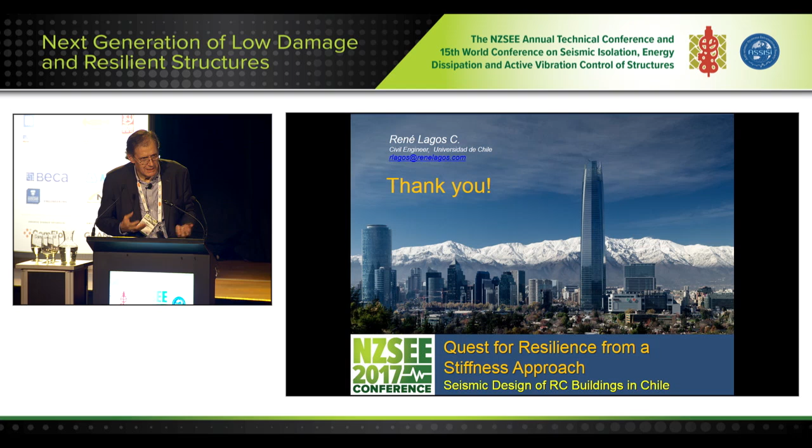Many of the people that accept doing that are just somehow emotionally involved in research or maybe in doing some improvement to society, but it's not a common issue. Usually what we get are buildings that belong to firms that want to represent social responsibility—they are willing to do that because in a way they're going to use it as marketing. There's nothing free in all this trade.

Thank you. I sense Peter's trying to promote more instruments in buildings.